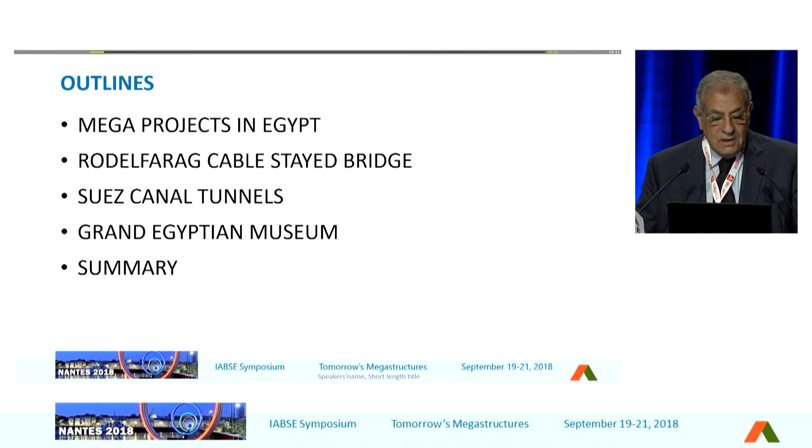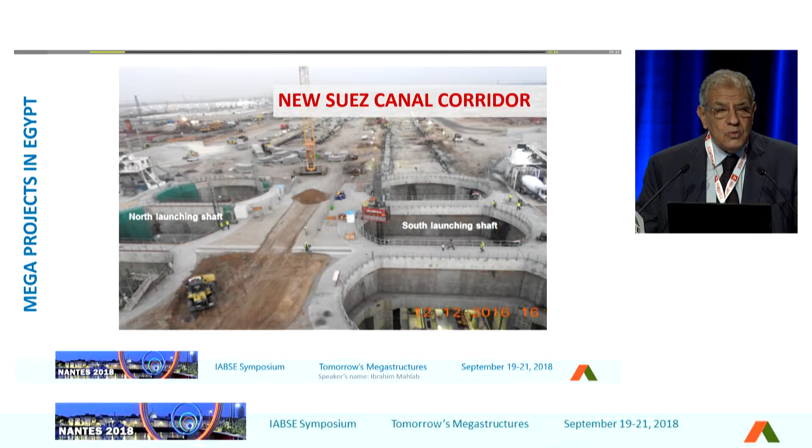During the last 4 years, mega projects in Egypt are diversified. We started with a very big project, the doubling of the Suez Canal. We dug a new canal parallel to the existing canal, with millions of cubic meters of dredging. And during this period, we used 22 dredgers, and we achieved this project in 1 year.

The second one is electrical power station plants. We added to our grid 25,000 megawatts in 4 years, and I think this is the biggest project in the field of electrical generation. Affordable houses, 1 million units are planned to be added. We achieved till now 650,000 units. New roadways, 7,000 kilometers are added to our network in 4 years. And this also, I think, is a very remarkable project in Egypt.

Reclamation of the desert. We add 1 million acres to be reclaimed in the desert. New cities, 14 new cities spread all over Egypt. And a new administrative capital is now under construction. That means that really Egypt now is a very big site, working 24 hours, 7 days per week.

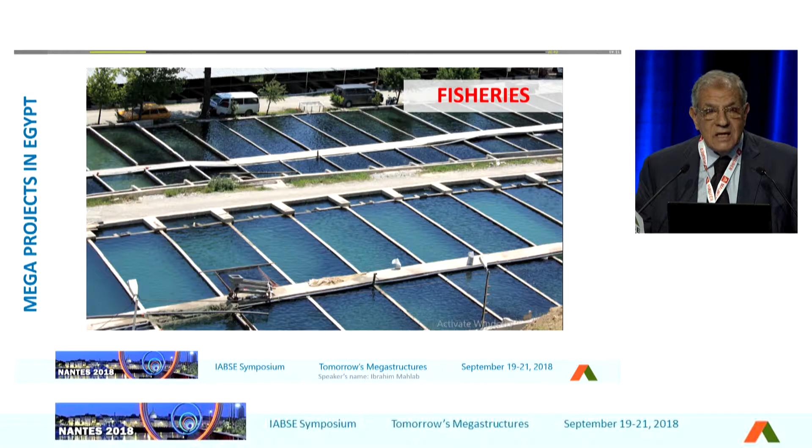Fisheries, we established a big fishery, 3,000 acres in the north of Egypt. Restoration of heritage and monuments. Egypt is full of heritage and monuments, and now we start to restore it. Mega projects in Egypt: the Rod El-Farag cable-stayed bridge is a remarkable bridge which we can really present, and the 2 other tunnels under the Suez Canal, we have to highlight those, and this is the Grand Egyptian Museum.

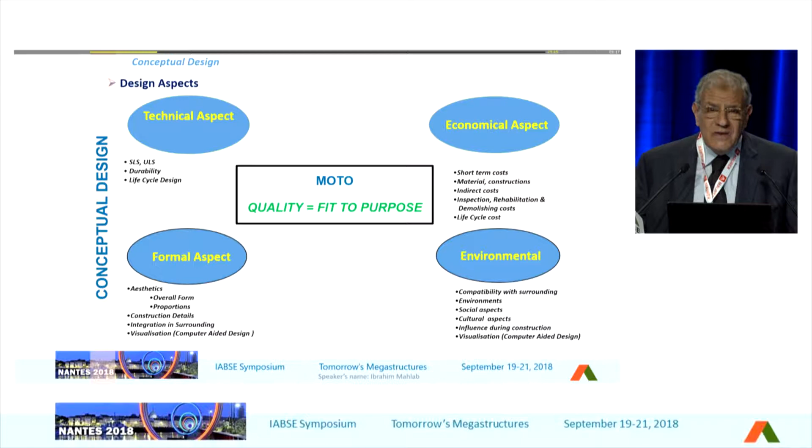Our motto is quality should fit to purpose. And this was the concept of our thinking. Technical aspects, economical aspects, formal aspect, and environmental. Those are the 4 factors we worked with, because we don't really have time, and it is a question of how to select the most optimized, the most economical project, and to start construction immediately. Design conditions, functions, client wish, budget, resources, location, construction give us the design aspects, design alternatives.

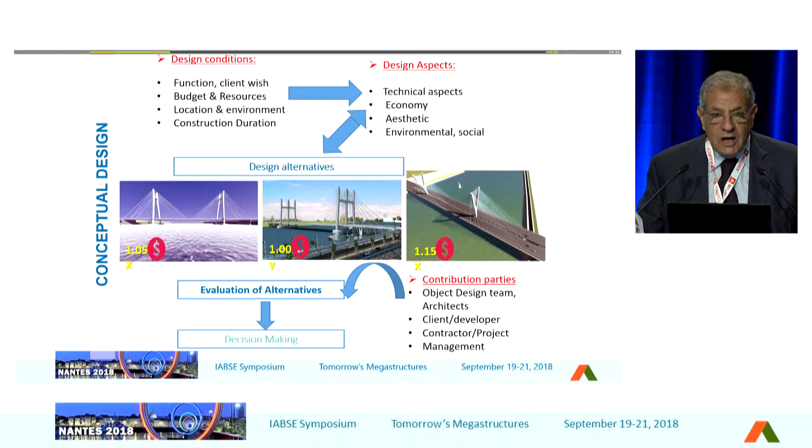Always we have to think about value engineering and to choose the most optimized project. Always there was a committee from the design team, architect, client, contractor, and project management. This was a permanent team working to select the most economical project. It gave us the evaluation of alternatives and the decision making, and decisions were taken in a very short time, and this was the big challenge.

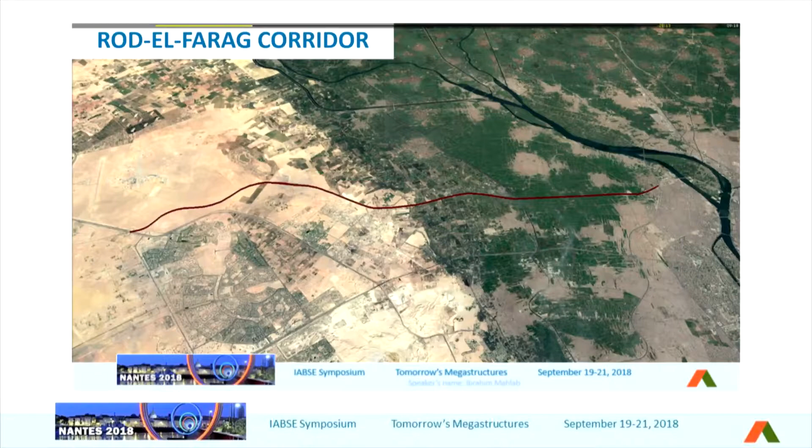Rod El-Farag corridor is a corridor in two stages. First stage, we have to go now... Okay, sorry.

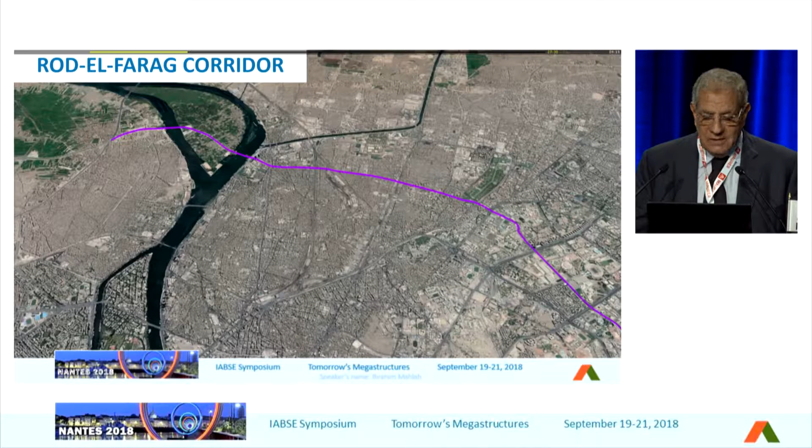This corridor is two stages. The first stage is 29 kilometers of routes. This is linking the west and the east of Cairo. The first stage was an elevated route, 29 kilometers of elevated routes, with 9 small viaducts and 12 underpasses and tunnels. This was sector 1.

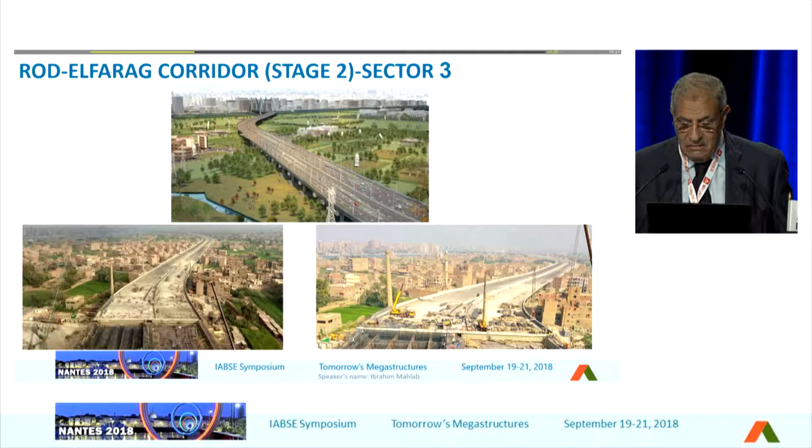Stage 2 is 5 sectors. The first one is a bridge with precast beams. The second one is a cantilever cable-stayed bridge crossing the Nile. The third one is also a viaduct crossing an island. The fourth one is a viaduct crossing a very congested area in Egypt, Shubra.

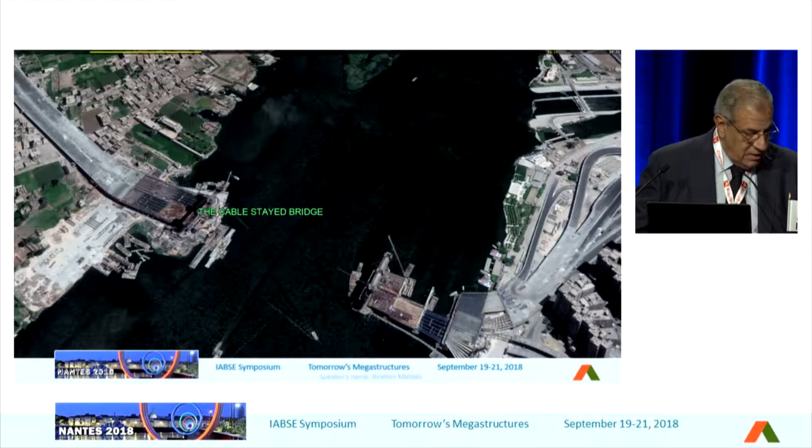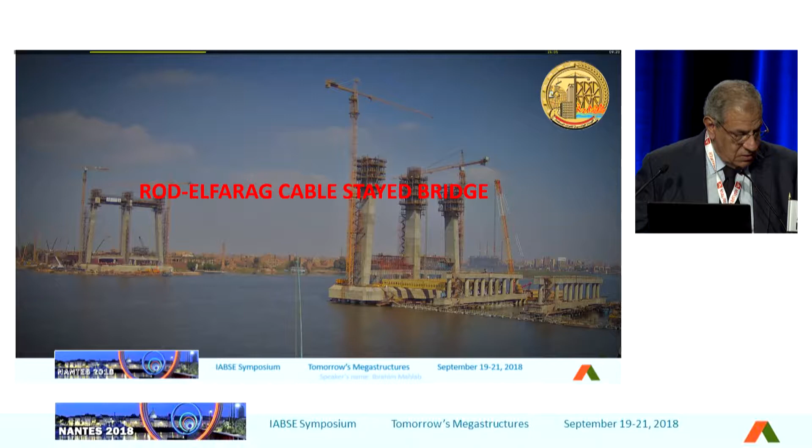The cable-stayed bridge is sector 4. This cable-stayed bridge really is very special because it is the first cable-stayed bridge crossing the Nile. The bridge has a semi-floating bearing system in the longitudinal and transverse direction. The bridge is floating in the longitudinal direction, in which the wind and seismic loads are carried by cables and towers, while the bridge is supported transversely by bearings to carry transverse loads due to seismic and wind loads.

The side span of the bridge has a concrete box section to work as a counterweight to the main spans under live loads, although its arrangement is not usual for such a side span to span ratio of 0.4. In construction, due to the bridge's heavy cross-section, it was constructed using a rigid temporary formwork, which was specially designed and constructed for supporting those heavy loads.

The bridge also may be one of the widest bridges in the world, because the width varies from 64 up to 88 meters. This is the height of the bridge pylons. It was constructed by climbing form. Every segment is 4.5 meters.

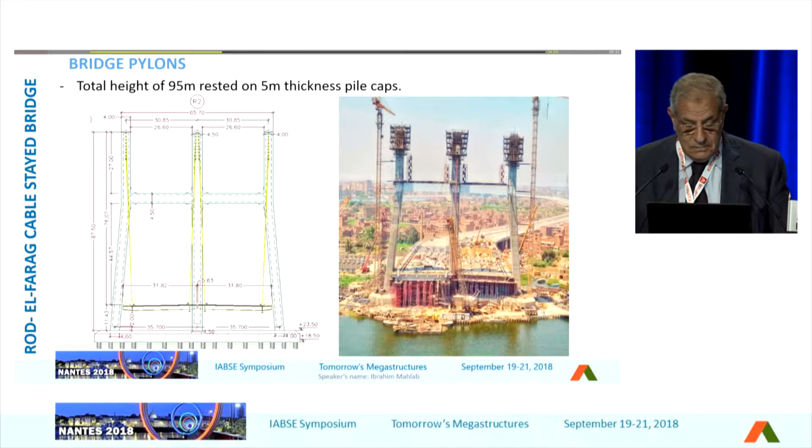The two 95-meter-high pylons have a hollow concrete cross section. The construction of the pylons was carried out using self-climbing formwork. Each pylon leg was divided into 20 casting segments with a height of 4.5 meters for each segment, with 6 platforms, as is considered for the heights of this construction type. And the figures show respectively the pylon cross-section segment and the adopted self-climbing formwork.

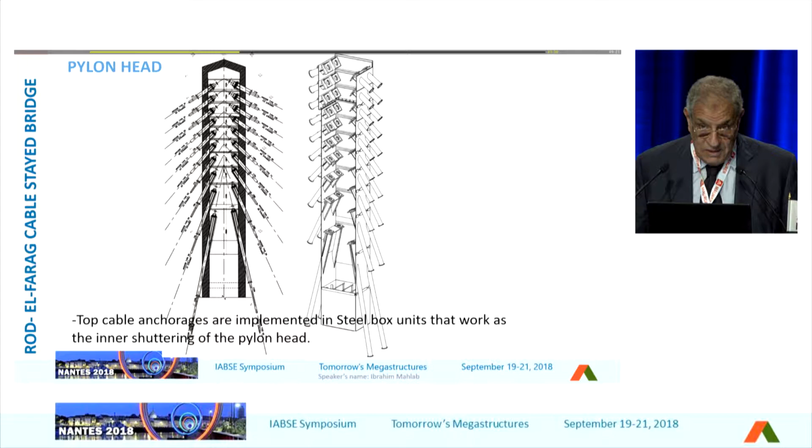This is the pylon head. This is a steel pylon head. The top cable anchorages are implemented in steel box units that work as the inner shuttering of the pylon head. This was fabricated outside in a workshop, and because of the angle and the accuracy, the tolerance is almost zero. And this is the pre-assembly of units for geometry control.

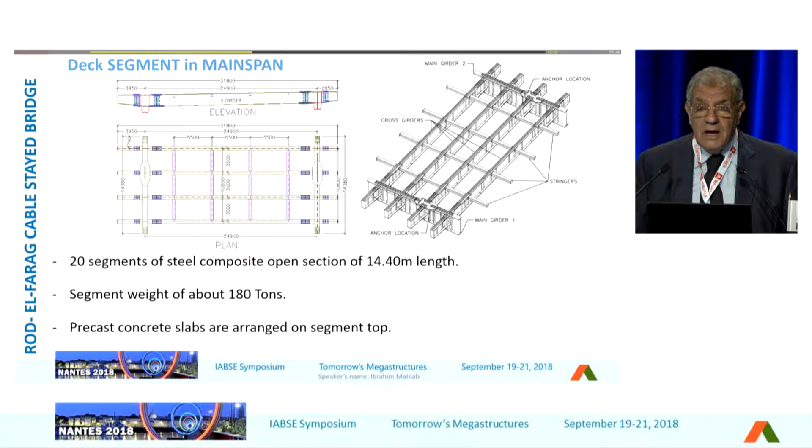The pylon head erection: after assembling it in the pre-assembly workshop, we transfer it to the site and start the erection. The deck segments in the main span are 20 segments of steel composite open section of 14.40-meter length. Every segment weighed about 180 tons. Precast concrete slabs are arranged on the segment top, and this was also pre-assembled in the pre-assembly workshop. Then we have to transfer it by barge and lift it to the site.

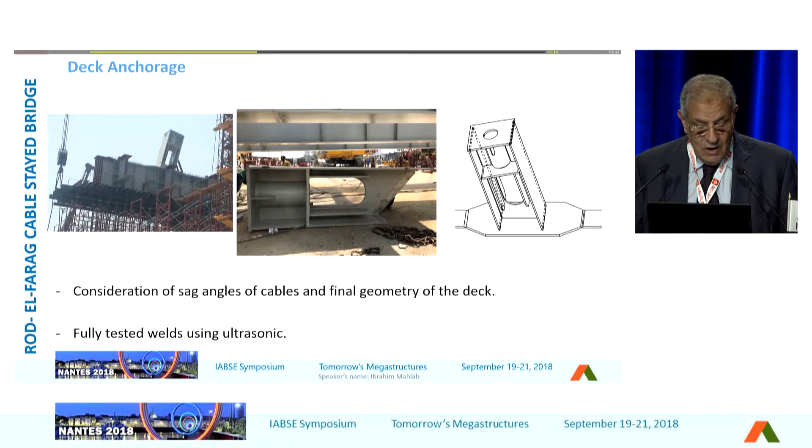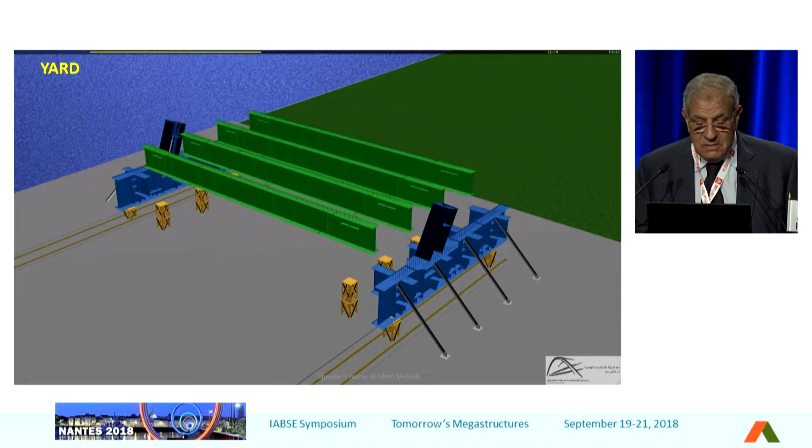The steel deck anchorage. This is the steel deck anchorage. Deck anchorage fabrication, consideration of sag angles of cables and final geometry of the deck, fully tested welds using ultrasonic. The main span deck segment pre-assembled in the yard. We are assembling 3 segments, and all the holes are fitted at the workshop. This is how we are assembling the deck segment in the yard.

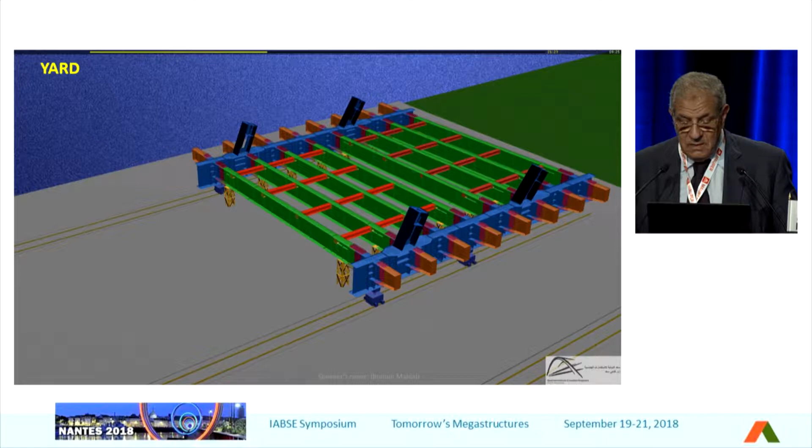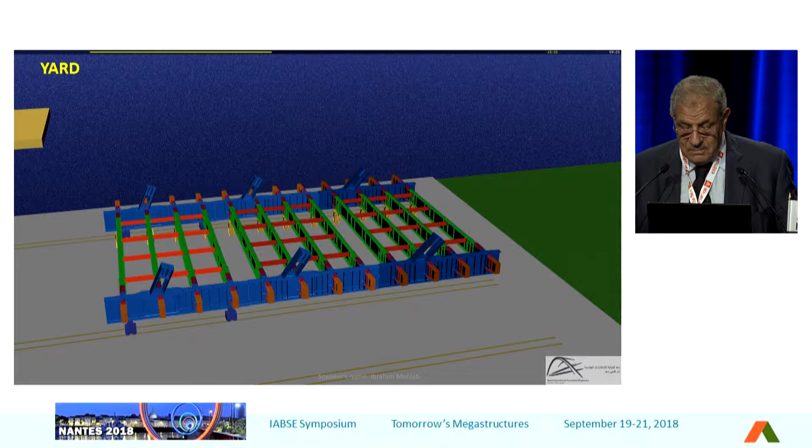The cross beams, then moved. The other segment comes. This is the second segment; this is very accurate fitting, so that the holes, when we are assembling it at the site, should be 100% accurate. And the third segment is coming. Then we are lifting it by cranes, putting the segment on the barge, and going to the site to be assembled.

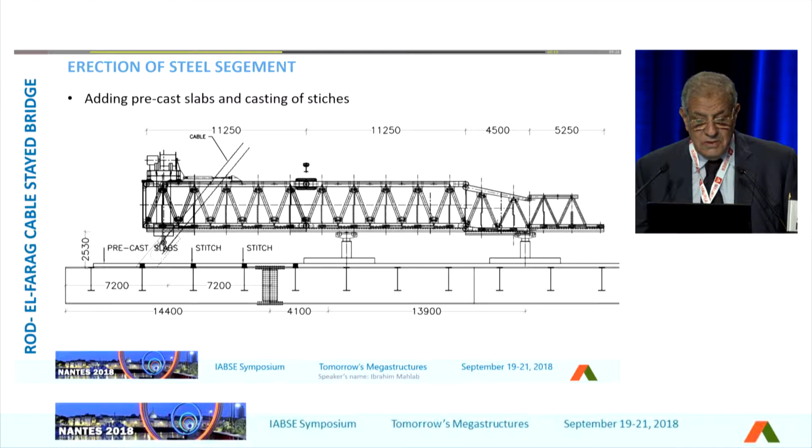We have used 2 launching girders for each segment. Every launching girder's capacity was 90 tons. This is the erection of the steel segment using the launching girder. Then we add the precast slabs, and then we are stitching the slab.

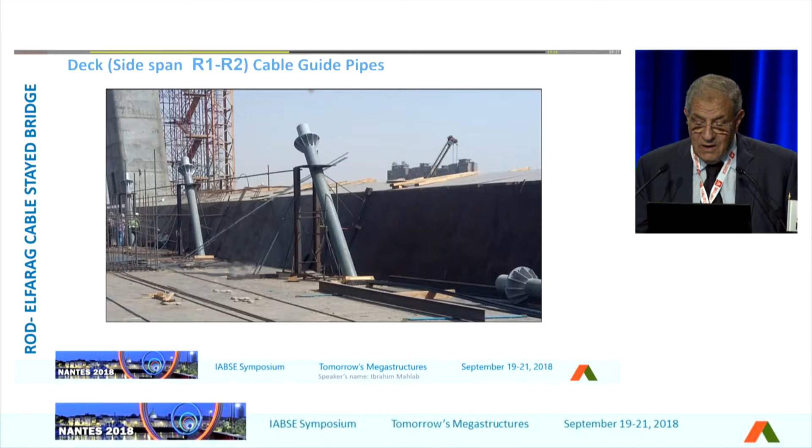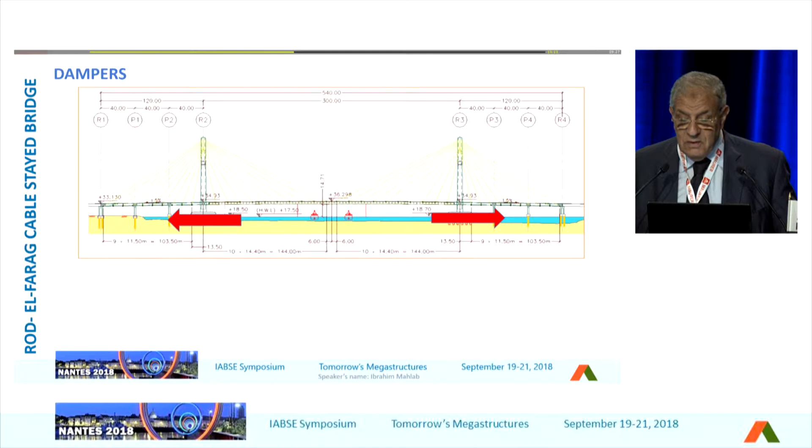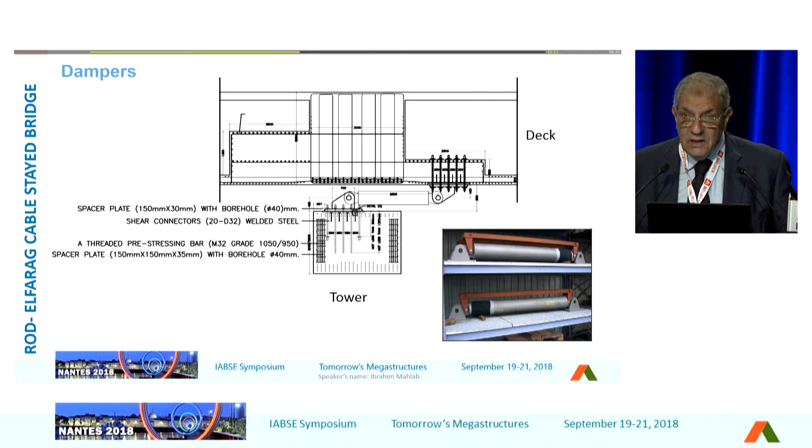This is a semi-floating bearing, floating in the longitudinal and fixed in the transverse direction. We have used what we call dampers; a spacer plate with boreholes, shear connectors, and a threaded pre-stressing bar spacer with boreholes was added in the pylon. And these are the 12 viscous dampers in the pylon, for taking all the stresses coming from transverse and seismic loads.

This was the erection of the first cable, and now I think they have started the erection of the second cable in Egypt.

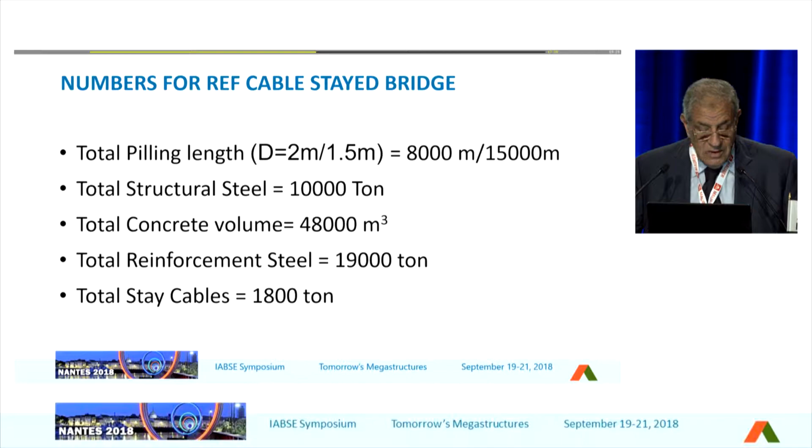Figures: total piling length, with diameters of 2 meters and 1.5 meters. We have used 8 kilometers of 2-meter diameter piling and 15 kilometers of 1.5-meter diameter piling. Total structural steel reached 10,000 tons. Total concrete volume is 48,000 cubic meters. The total reinforcing steel is 19,000 tons. The total stay cables are 1,800 tons.

And always we have to cross the Suez Canal by bridges. We constructed a cable-stayed bridge over the Suez Canal, but we need four tunnels. We are constructing now 4 tunnels under the Suez Canal.

The Suez Canal is very important, not only for Egypt, but for all the world, because the location of Egypt is in the center of the world, linking the Red Sea with the Mediterranean, and the Indian Ocean with the Atlantic Ocean. That means this is a very important location in the world.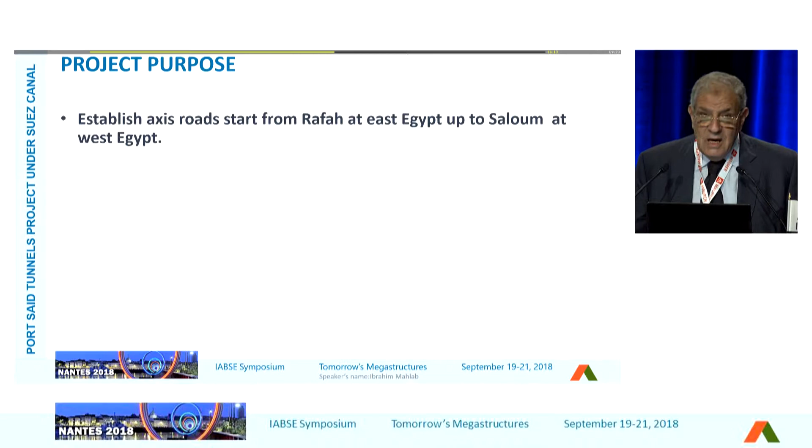We thought about those 4 tunnels, and at the same time we are creating an economical, logistic, industrial zone in Egypt east of the Suez Canal. The project purpose is to establish an axis road from the west of Egypt to the east of Egypt, direct, without any obstacles. And to connect the international coast road with the west side of the Suez Canal

to reduce the distance by 100 kilometers to cross the canal according to the current situation, and serve East Port Said and the investment-free area, providing new investment opportunities and accelerating the urban area in Sinai, encouraging the citizens in the East Delta to be transferred, because Sinai represents almost 6% of the area of Egypt, but it is hardly inhabited. The population is more or less 500,000. Egypt is 100 million. That's why we want to encourage people to go and live in Sinai.

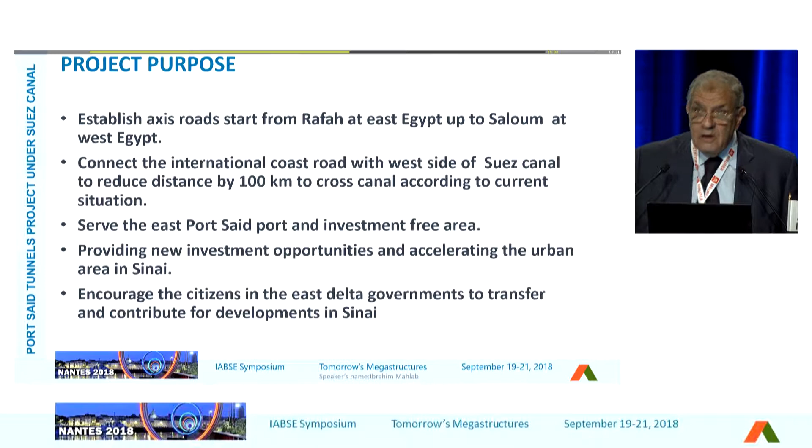Technical project challenges: tunneling in silty clay layers without affecting the navigation in the Suez Canal. This is very important, that we are constructing the tunnel without affecting the traffic navigation. The tunnel boring machine modification due to dissolved methane gas. This area is full of methane gas layers. And transferring the material was another challenge, how to transfer the material from the west to the east.

Soil condition: this area has the worst soil condition in Egypt. The clay layer, very soft, highly plastic clay, 42 meters thick, with penetration values of less than 5. The sand layer, very dense quartz sand, 70 to 100 meters thick, and a clay layer, hard silty clay, less than 3 meters thick with sand layer 2. Groundwater level above mean sea level, and this area is chemically very aggressive.

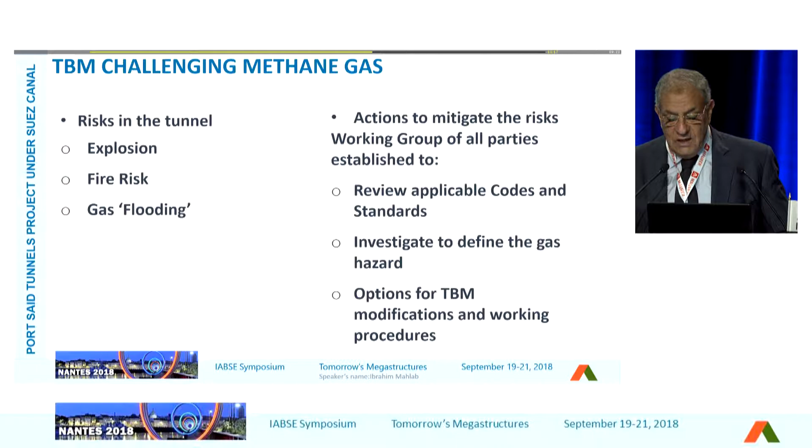We started to make a kind of soil improvement, and we had to face the methane gas challenge, because the risk was very dangerous: explosion, fire risk and gas flooding. To mitigate the risk, with a working group of all parties, we reviewed applicable codes and standards, and we investigated to define the gas hazard, options and modifications in the tunnel boring machine.

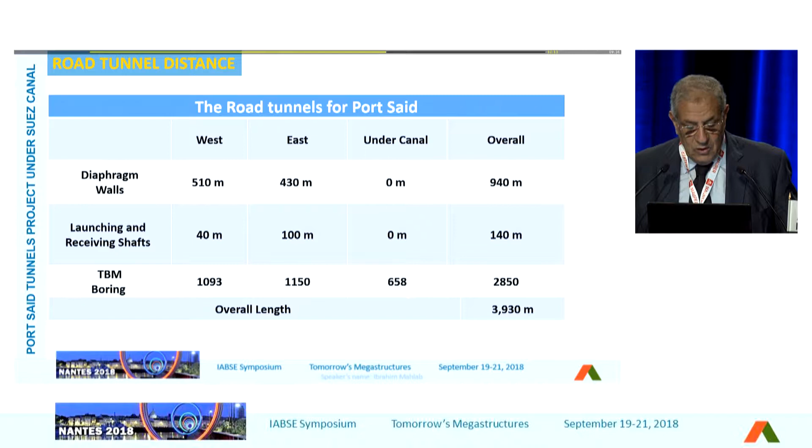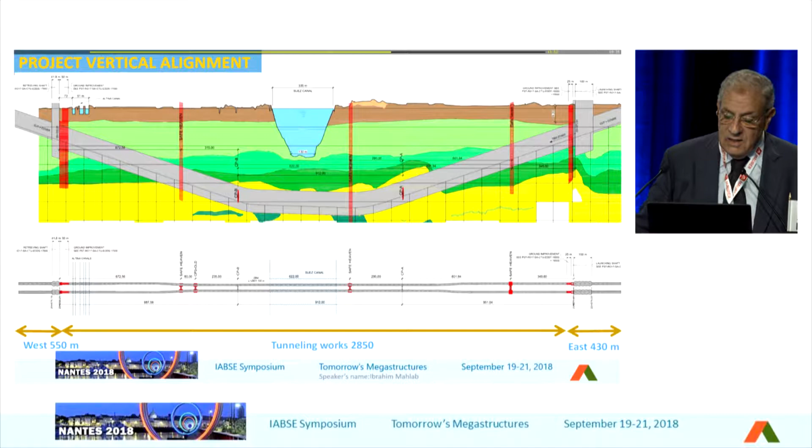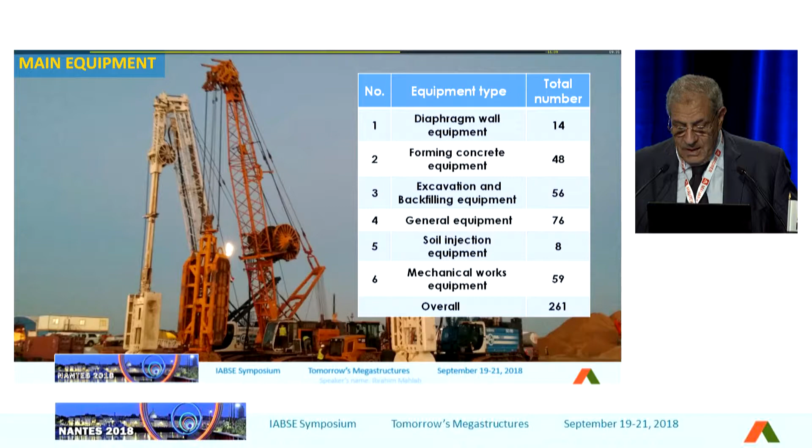We used 14 diaphragm wall equipment, forming concrete equipment 48, excavation and backfilling equipment 56, general equipment 76, soil injection equipment 8, mechanical works equipment 59, and overall there were 261 equipment at the site.

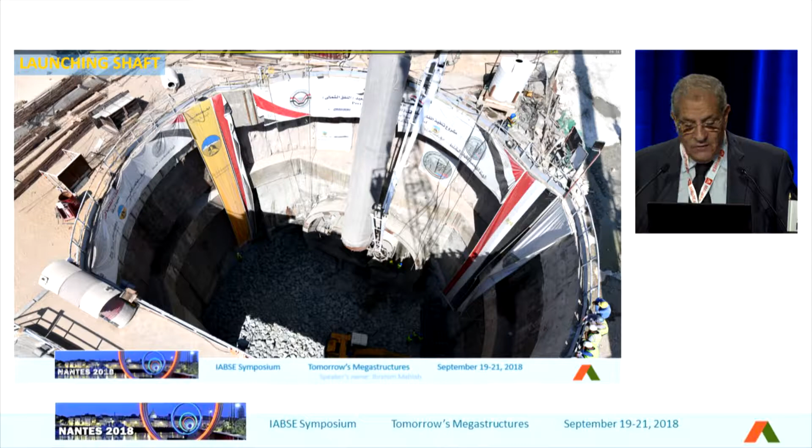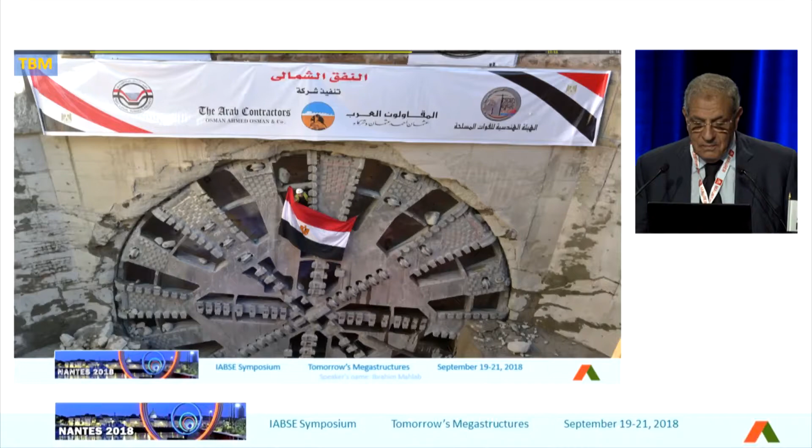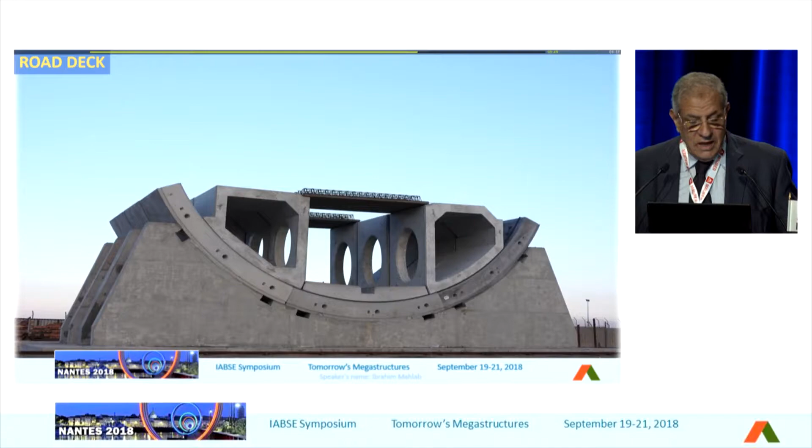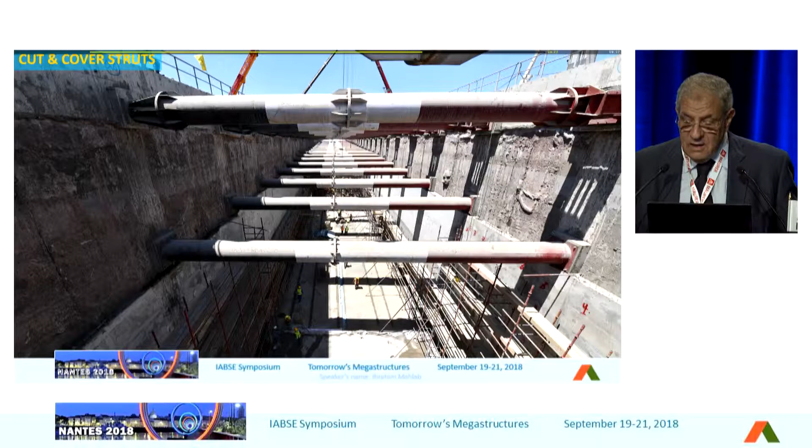This is the road deck. It was precast, and now we are fixing the road deck in the tunnel. This is planned to be open mid of next year. This is the cut and cover and diaphragm and the struts. This is the cut and cover area.

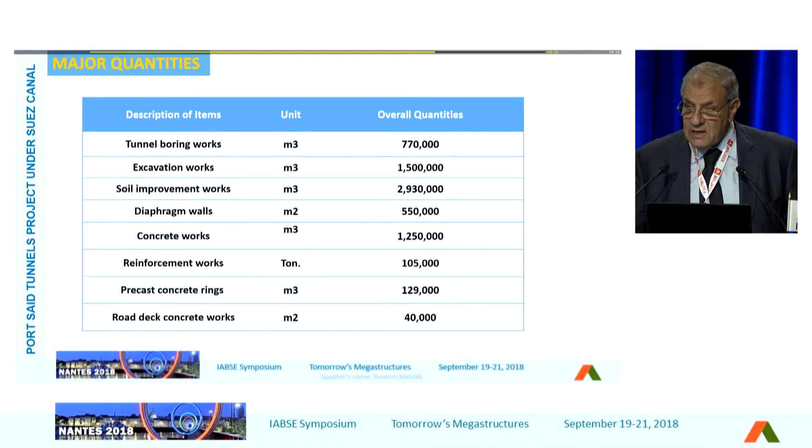Major quantities: the tunnel boring works, 770,000 cubic meters; excavation work, 1,500,000 cubic meters; soil improvement work, 2,930,000 cubic meters; diaphragm wall, 550,000 square meters; concrete works, 1,250,000 cubic meters; reinforcement work, 105,000 tons; precast concrete rings, 129,000 cubic meters; road deck concrete works, 40,000 square meters.

From this figure, you can imagine the challenge, because we started at the beginning of 2016, and almost the tunnel is structurally finished. Last but not least is the Grand Museum.

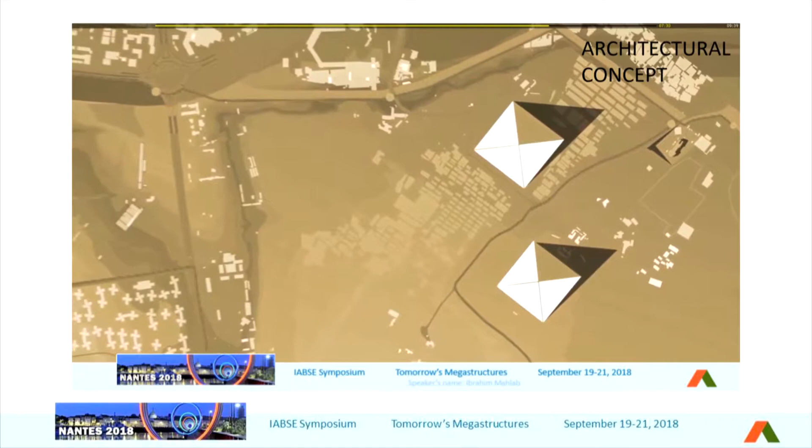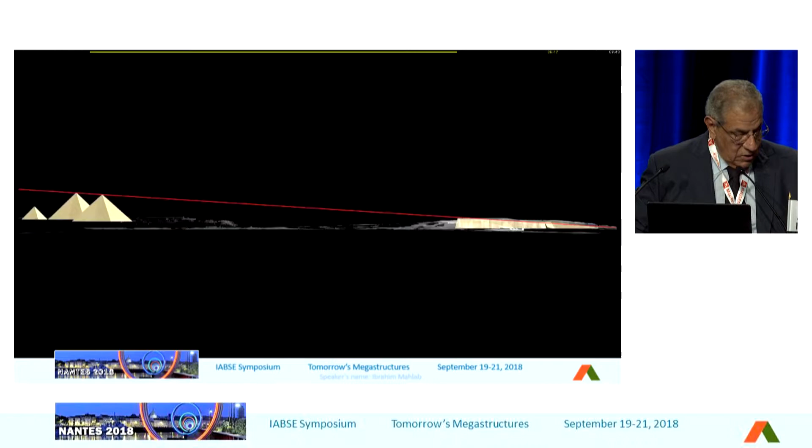This is the Grand Museum on the plateau of the pyramids. It's 2 kilometers from the pyramids. And really, the architecture thinking is, it was a competition, and this was the first prize. The architectural design of the museum was based on the concept of pyramids, formation in both elevation and plan views. The main building footprint was planned based on the pyramids' plan grid lines.

This is the relation between the structure and the monument, the pyramid. The sight lines regarding the three pyramids, starting from an exact point at north and west, intersect with each other forming the building footprint. This is the idea, how the projection in elevation and plan intersect to create the location of the museum.

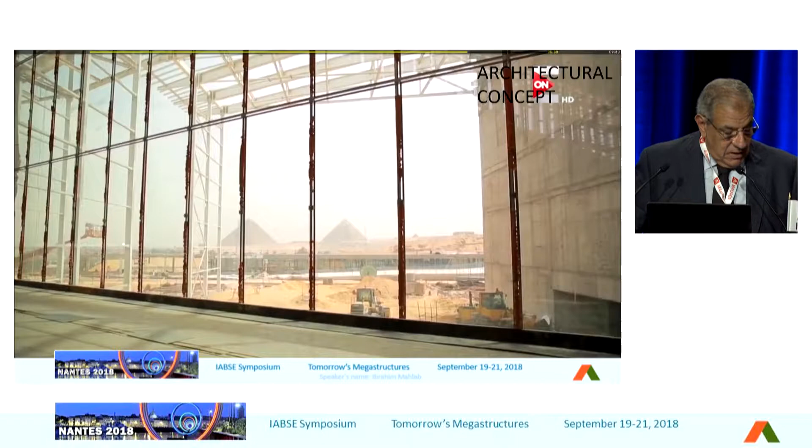There is an entrance courtyard. The entrance courtyard contains a long span opening, mesh roof, primarily for shading. The entrance is located at the heart of the master plan. And if we look, there are 26 components, but the structure itself is 1, 2, 3. Those are the structure, but the others are landscaping.

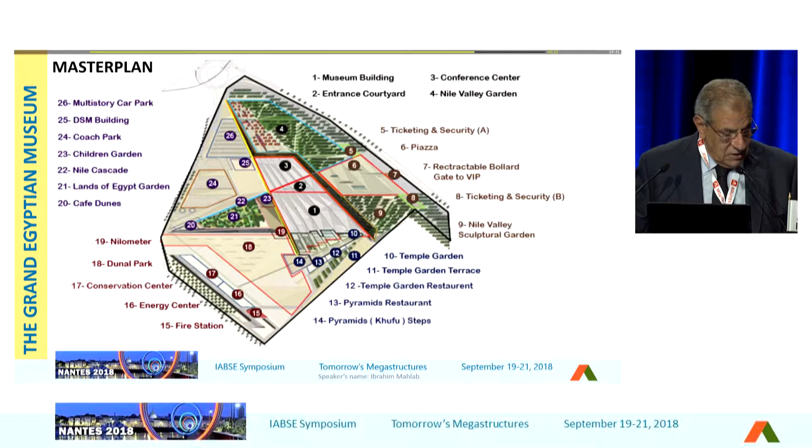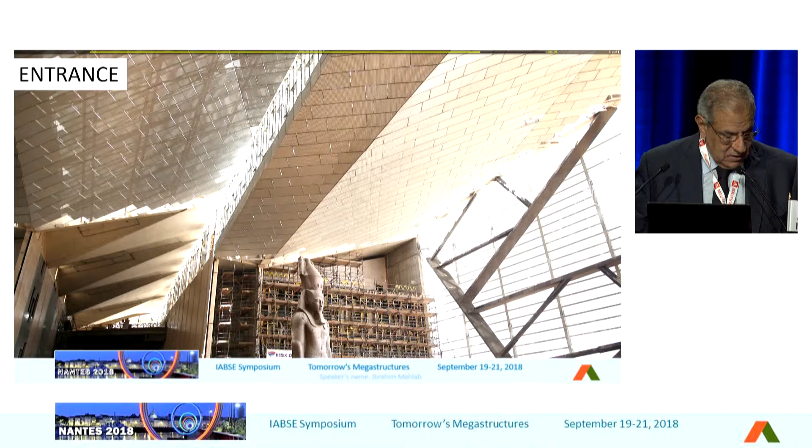The structural system of the roof is composed of long span steel trusses rested on movable elastomeric bearings on reinforced concrete corbels, as shown in the figures. The truss cross-sections are made of box steel sections with dimensions ranging from 40 centimeters to 80 centimeters and thickness up to 9 centimeters.

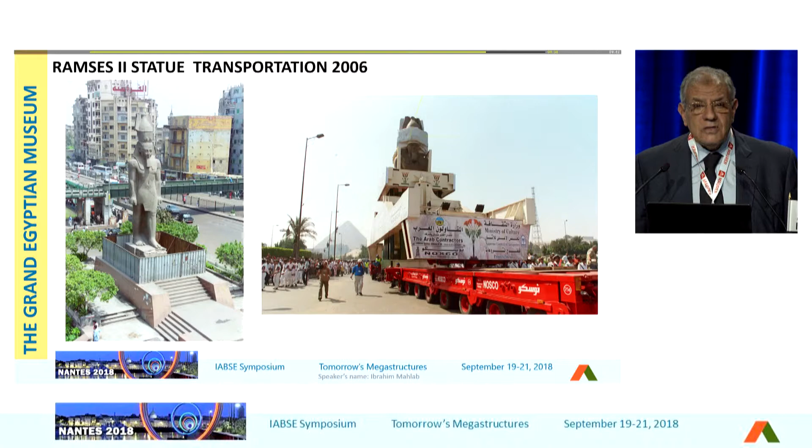In the entrance, we put the statue of Ramses. And there is a history for the statue. This was relocated from a very congested area to the museum. And this is another project, but it will take a long time. The relocation and the transportation through the city was broadcast by more than 70 international televisions.

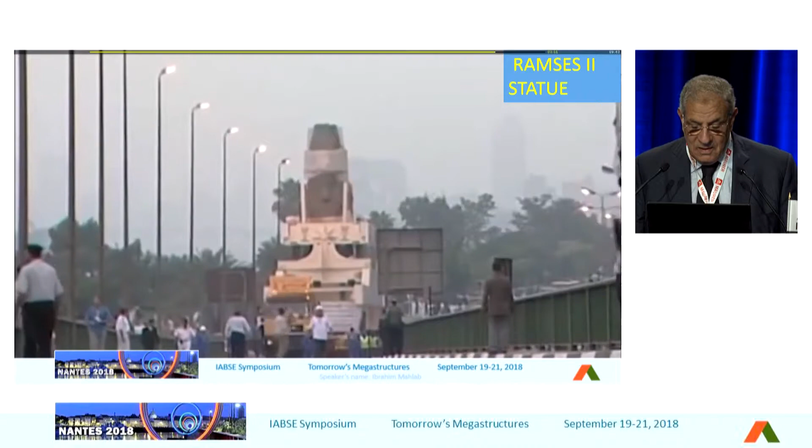This was the original place, in a congested area near the railway, but the pollution and the congestion forced us to relocate it, and we transferred this statue in the year 2006 to the site of the museum. We took more than 1 year for the safe transportation of this statue.

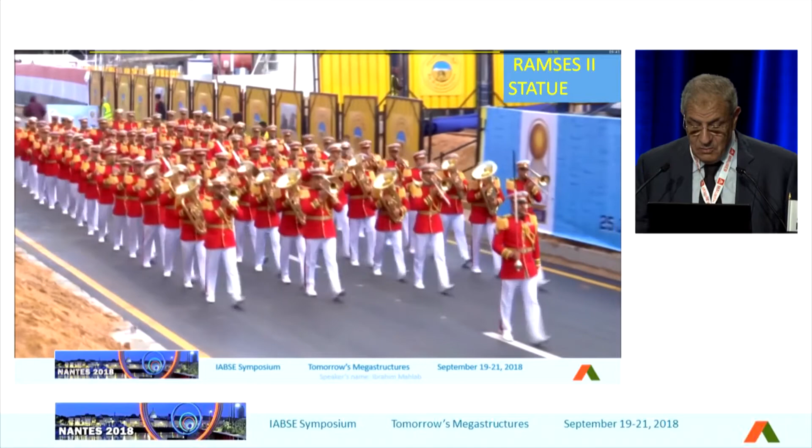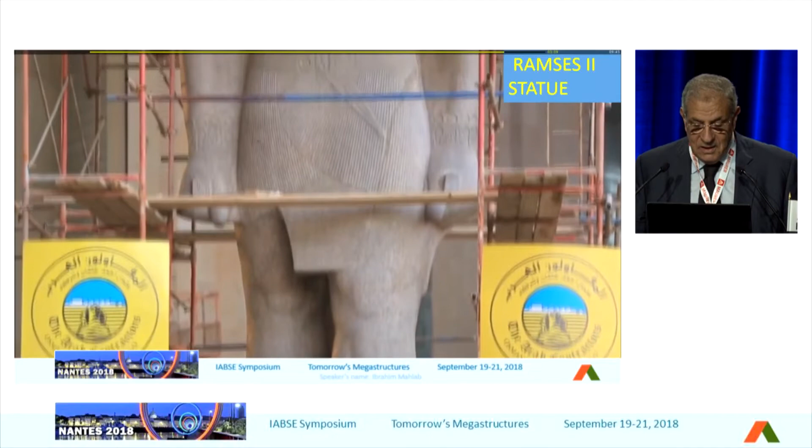And this year we moved it from the storage in the museum to the final place in the entrance. And we considered him as a king, and it was a small parade and festival to receive King Ramses in his final place. This is the main place in the museum.

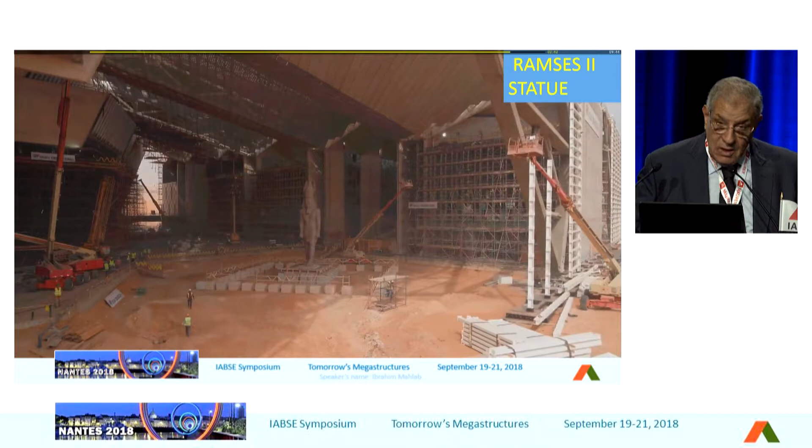This museum is planned as a museum of the arts and crafts of ancient Egypt, described as the largest archaeological museum in the world. The museum is under construction. The full structure is finished. Now we are in the finishing, the landscaping and electromechanics. This is the main building roof, which I described, the steel trusses.

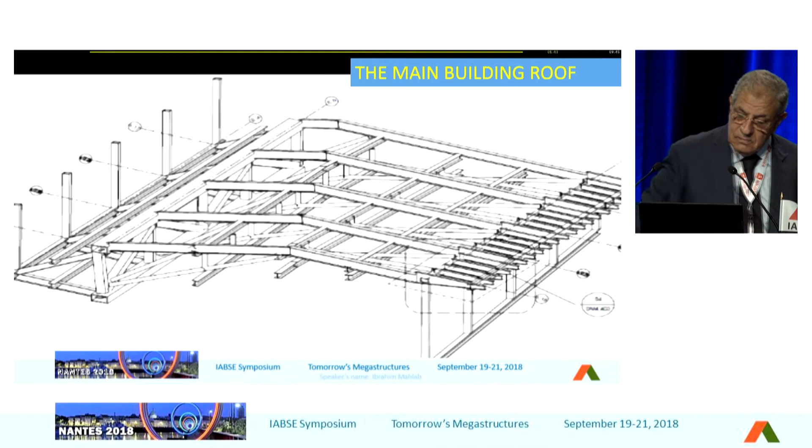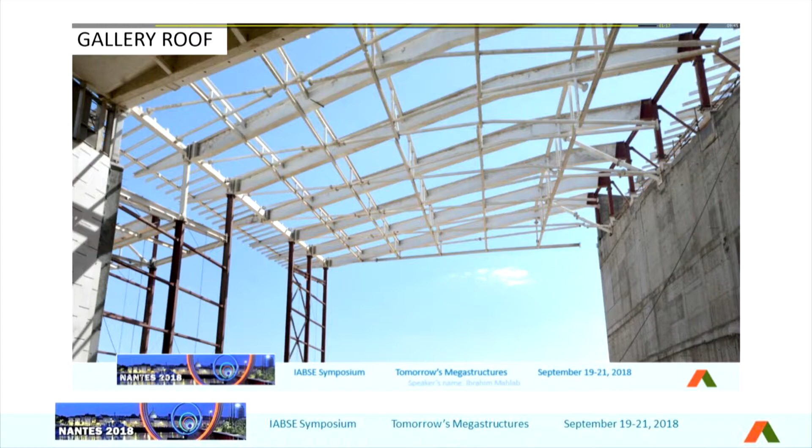The main building roof. Gallery roof. Over the museum and conference center, a concrete folded plate roof together with an external shaded void and internal ceiling void fill the roof volume, and this is shown in the photos.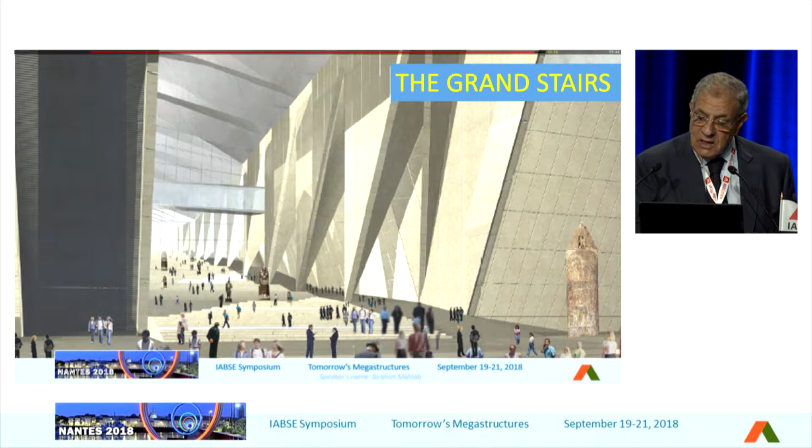The main building structural system consists of a steel beam grid with I-beam cross-sections. The main beams are supported by the main trusses of the roof, while the secondary beams rest on the main beams. This is the grand stairs. The grand stairs, people are going to sit on the steps, and from the steps they can look to the pyramids.

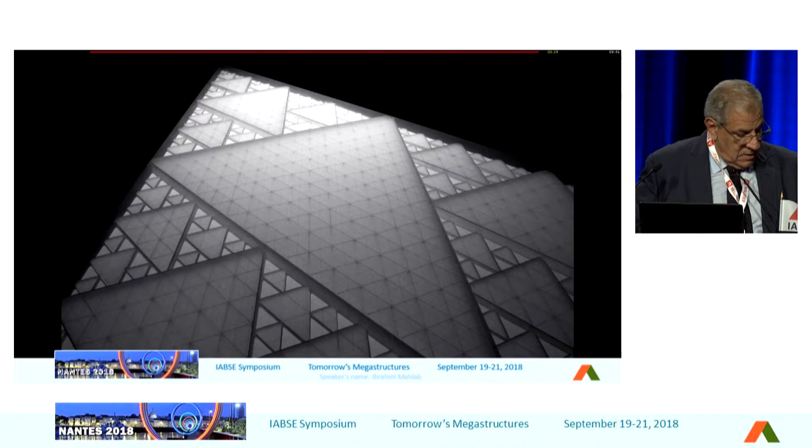This is the facade. The structure system of the pyramid's wall is comprised of a vertical steel grid of box steel sections aligned in the diagonal direction and supported on a reinforced concrete wall as shown in this figure.

At the entrance opening, mega steel panels are used to support the facade cladding. During construction, the fixation of steel diagrid in the concrete wall was followed by mounting the stone tiles.

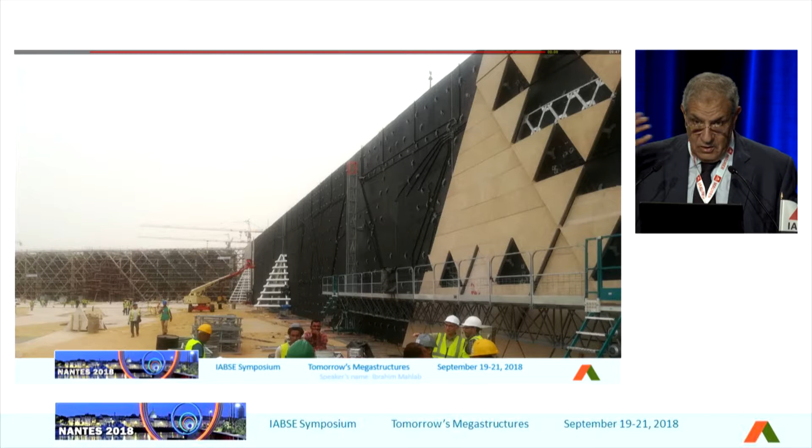Those are transparent stone. In the sun, it will be transparent. At night, it will be lighted from behind, between the steel trusses and the facade.

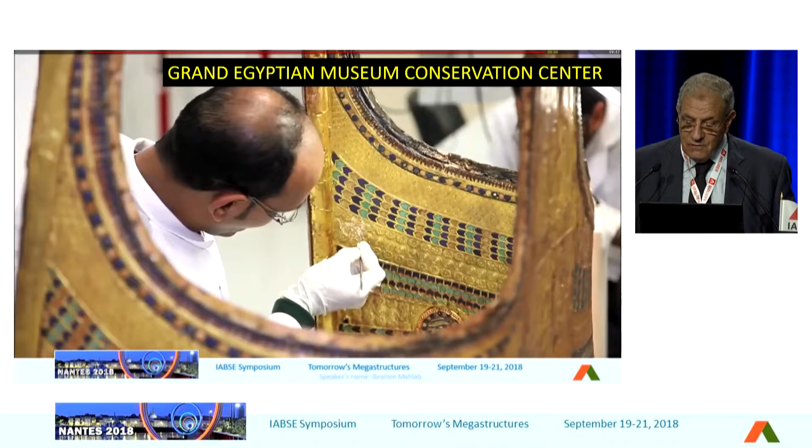At the same time, we have a big workshop in the museum for conservation, and there is a conservation center where all the monuments are going to be exhibited in the project.

There was a very strict environmental strategy in this project.

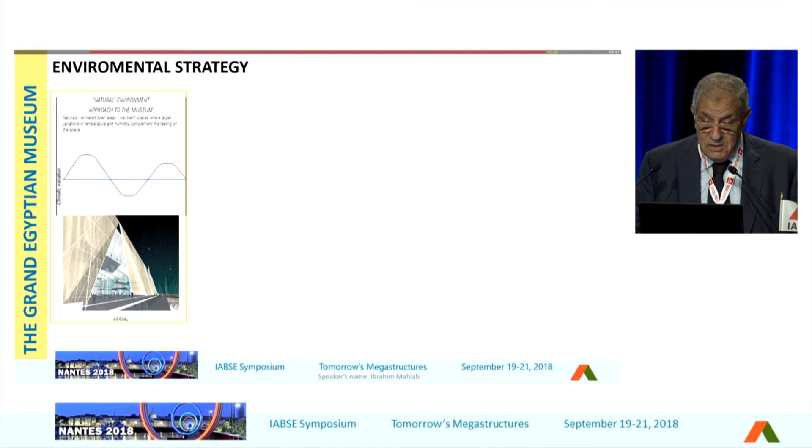Conclusion. We really achieved our goal. The improvement in the Egyptian economic indicators after downgrading triggered the rating agency to upgrade the sovereign rating of Egypt.

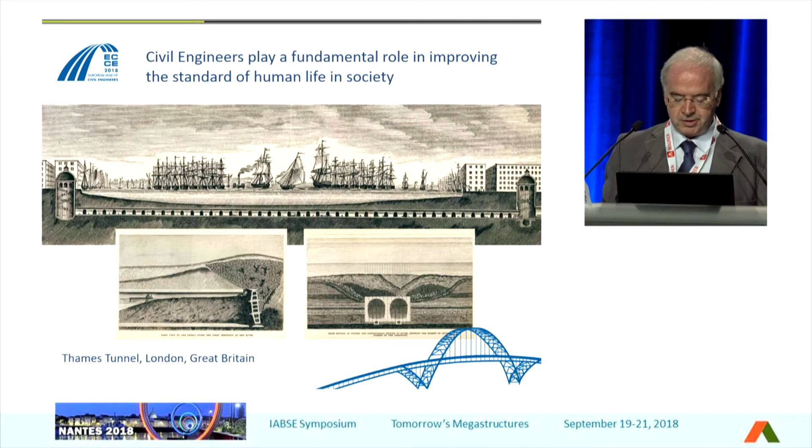During this year, ECCE wants to reinforce the fundamental role of civil engineers in society in improving the standard of human life from the old years until now.

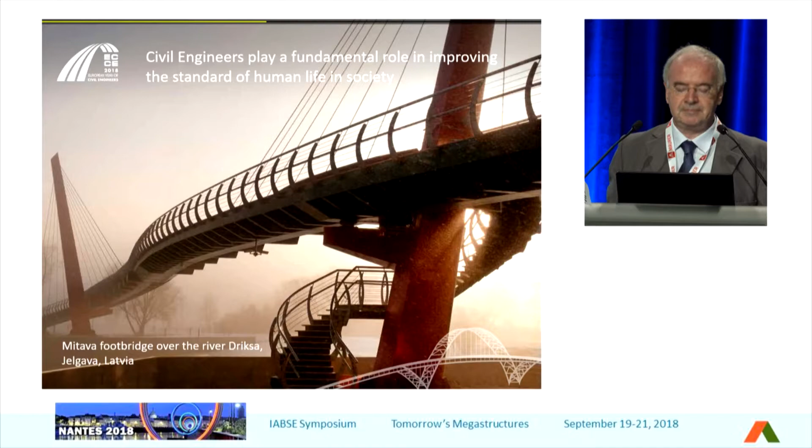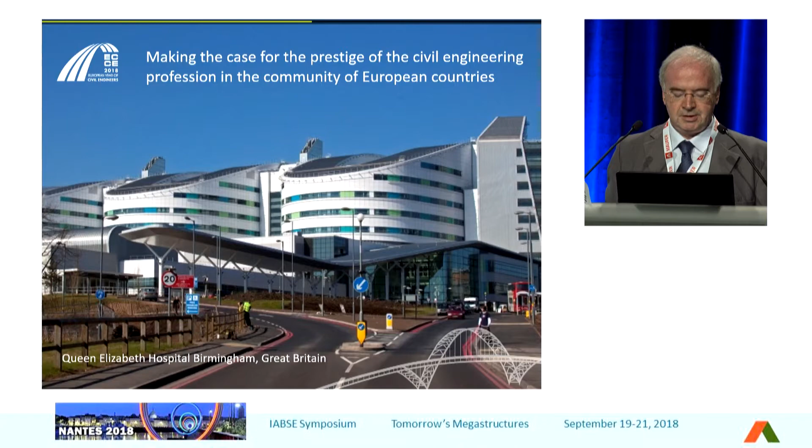We accomplished this through many different types of projects, including dams and reservoirs, water distribution and treatment facilities, road networks and bridges, foot bridges, rail networks, energy generation and distribution facilities, but also stadiums and cultural and social facilities, and many others like airports.

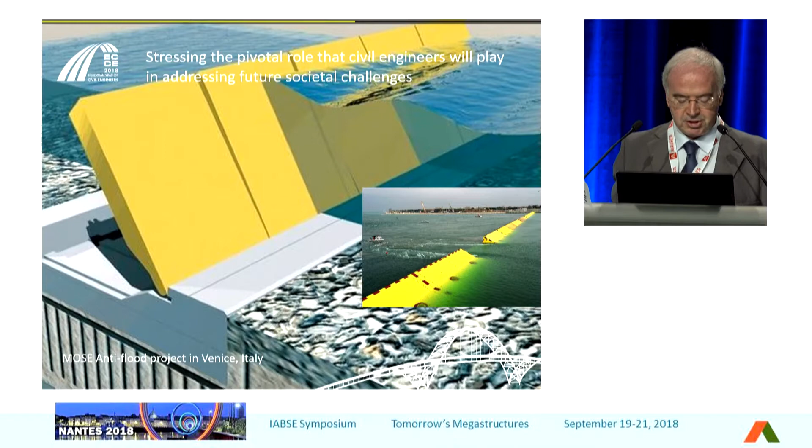Finally, ECCE wants to stress the pivotal role that civil engineers will play in addressing the challenges that will face society in the future, including rapid urbanization, climate change, and the digital revolution. I hope this has given you a useful introduction to this year's EYCE, the European Year of Civil Engineers.

So it's time now to move to some main features of the organization of our symposium.